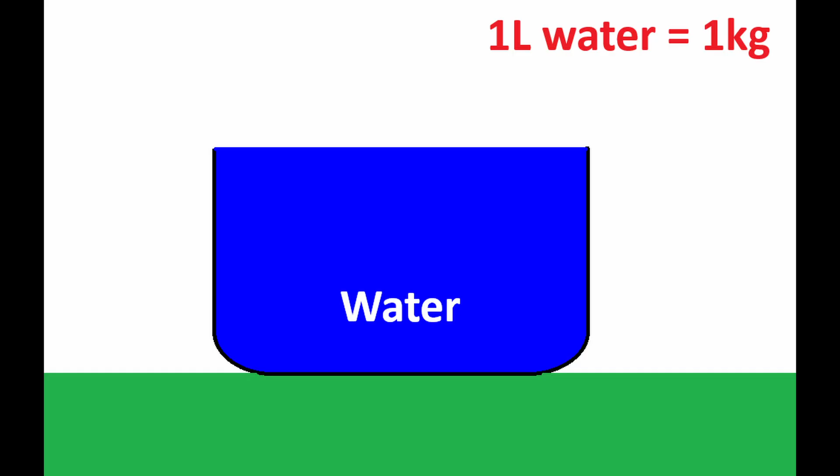For example, imagine a pool of water filled right up to the height of its container walls. Water has weight: 1 liter of water weighs 1 kilogram. If a human being dips their whole body into this pool, the presence of their body will displace some of the water in the pool, causing it to spill out. The volume of water that spills out is equal to the volume of the human body.

The weight of that water is equal to the buoyancy force on the human body within the pool. If the body weighs less than the water it displaces, it will float. The same principle applies to a balloon that displaces a volume of air.

The total force of buoyancy pushing the balloon up is equal to the weight of the displaced air. The balloon will float if there is a net positive difference between the weight of the displaced air and the weight of the balloon. The weight of the balloon here would be the materials that make the balloon, as well as the weight of its passengers and cargo.

But how can we measure the weight of a volume of air? This can be calculated if we know the air density. Using the air density, we can find the weight of air for a given volume V with the equation: the weight of air, W_air, equals the density rho times the volume V times the gravitational acceleration constant g on Earth's surface, which is 9.81 meters per second squared.

Air density is usually readily available information which you can reference for a given temperature and pressure. However, it's also possible to calculate air density using the ideal gas law with a temperature and pressure value. Let's determine the lifting capacity of a balloon of our own making.

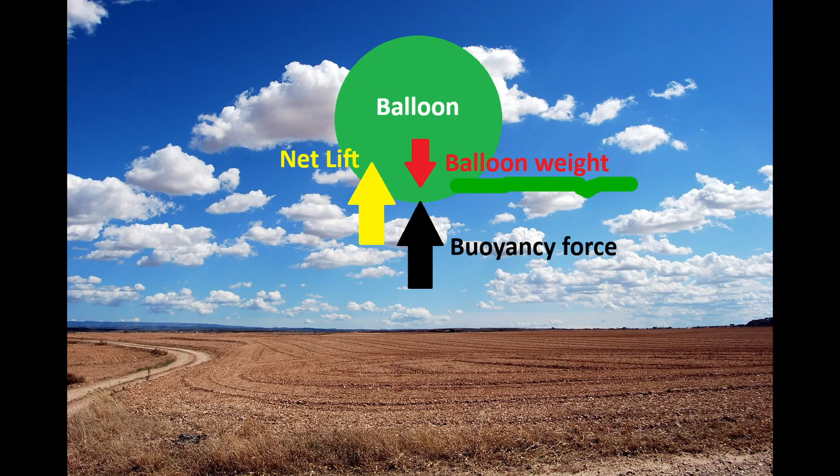The actual net lifting force that the balloon experiences is the difference between the buoyancy force and the total weight of the balloon, its contents, and its payload.

For example, let's fill the balloon with helium gas, which is lighter than air. Helium has a density 7 times lighter than air. The weight of helium for the volume of the balloon is 7 newtons, meaning it weighs about 0.7 kilograms or 1.6 pounds. Thus, if we take the mass that can support our buoyancy force being 11.3 pounds and we subtract 1.6 pounds of helium, that leaves approximately 9.7 pounds for the rest of the balloon materials and any additional payload it is expected to carry.

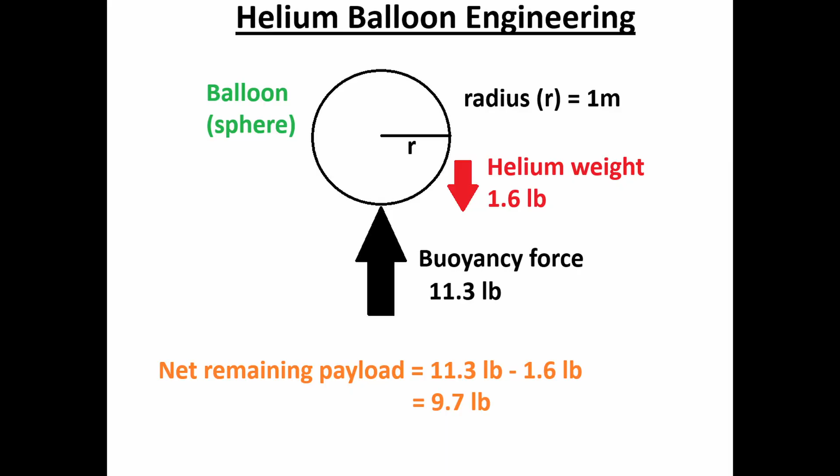Interestingly, we don't need to fill a balloon with a substance like helium to get it to float. It also floats using hot air to create a hot air balloon. When air is heated, its molecules acquire more kinetic energy, meaning they twist, vibrate, and travel at faster speeds. This also means that the molecules will naturally tend to space themselves out further, meaning that the air density decreases. This lower air density for hot air means that the displaced balloon volume will be lighter than the ambient air.

The use of buoyancy to generate lift is based on creating machines that are ultimately lighter than the air that they displace. However, modern aircraft are much heavier than air, so how is it that they are able to fly? Airplanes generate lift using wings or airfoils.

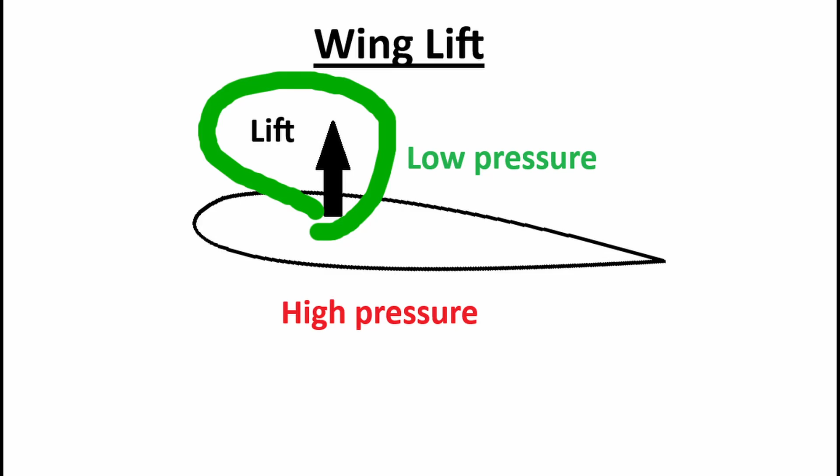Wings produce lift by generating an air pressure difference between the top and bottom sides of the wing. Lower pressure on the top of the wing versus higher pressure below produces a net force pointing upward, keeping the plane aloft. When air travels around an airfoil, the air streams are forced to move around the body since the airfoil is obstructing the path of the airstream.

The air streams diverge at the front tip of the wing, some going up and over the wing while others travel beneath the wing. In either situation, there is a conservation of mass of the airflow. There's no additional air being created or destroyed, it merely travels across the wing. The amount of air mass traveling across the wing per unit of time while the plane is in steady flight is constant.

The mass that travels over the top of the airfoil tends to bunch up while it navigates around the body. This bunching up means there is less space or area for the mass to flow through. Since the flow of mass around the wing is constant, that means the only way that the mass can continue to flow at the same rate through a smaller area is by speeding up.

This phenomenon is similar to what happens when we plug the end of a water hose with a finger. The water will all of a sudden start to shoot out of the hose at a much faster rate.

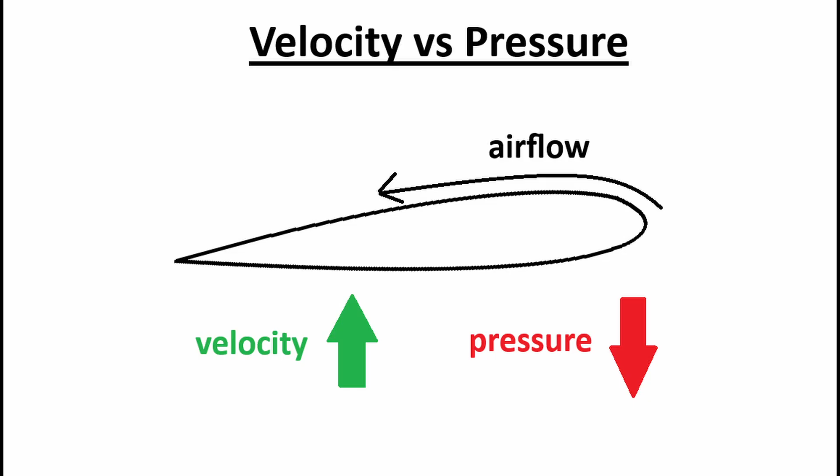There's a link between the velocity of the air mass and the pressure it experiences. This relationship is captured in a formula called Bernoulli's equation. It shows that the pressure plus 1/2 of the air density times the square of the air velocity is constant. Notice that if the velocity of the air goes up, like when the air passes over the top of the airfoil, that means the air pressure must go down to satisfy the equation.

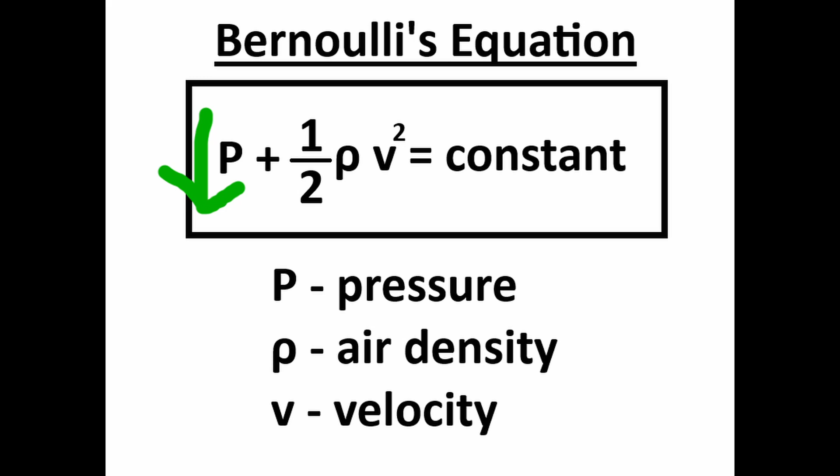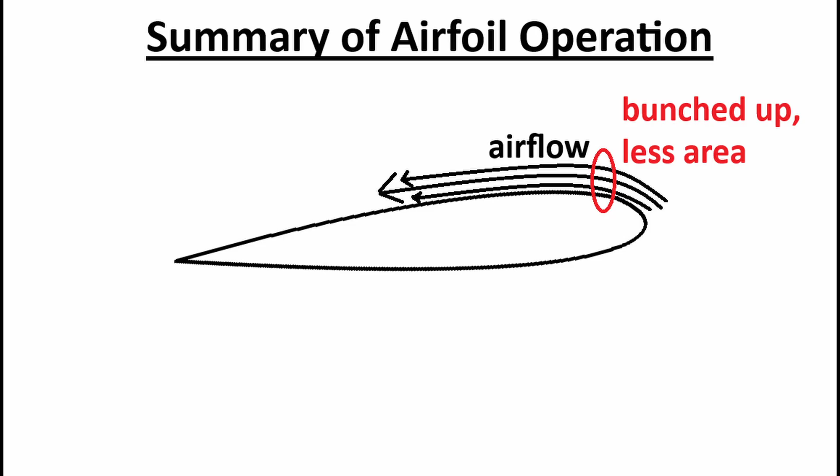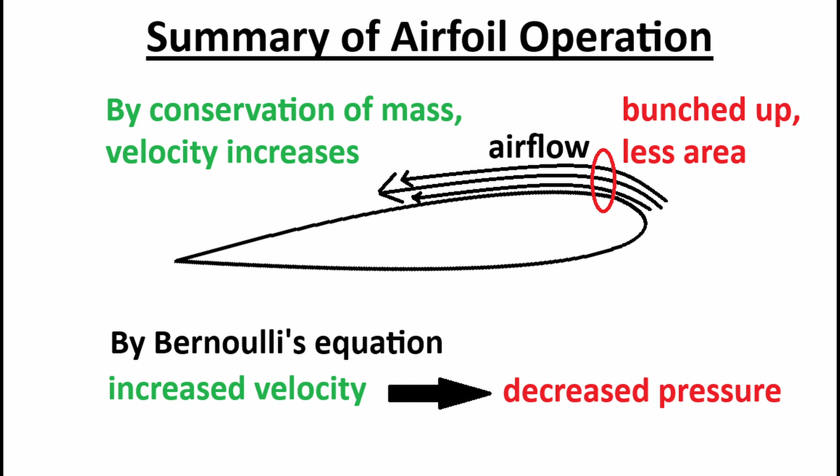So to summarize, air is forced to move around the airfoil, which is obstructing the path of the airflow. The air stream bunches up as it moves over the top of the wing, which reduces the area that the air can flow through. Due to the conservation of mass, the air is forced to speed up to maintain a constant airflow. Then, by Bernoulli's equation, we see that the increase in air velocity means that there is also a decrease in pressure. The net difference between the air pressure above the wing and the air pressure below the wing results in a lifting force.

We can conduct a simple experiment to demonstrate a mass flow over a curved surface and Bernoulli's principle. Take running tap water and a spoon. Here, the spoon acts like an airfoil and the water mimics airflow. Hold the spoon by the tip of its handle so that it's dangling below your fingers. Now gently bring the spoon into the flowing water stream.

Notice that the spoon will experience a force that attracts it towards the water flow. The spoon experiences lift within the water stream.

Additionally, notice that the air that runs over a wing takes a curved path. In order for that airflow to curve like that, there needs to be an applied force. This force comes from a higher pressure on the outside of the curved airstream toward the lower pressure on the inside of the airstream. In fact, as you move from a distance far away from the airfoil toward the surface of the airfoil, the pressure steadily decreases.

The stronger the curvature of the airflow, the lower the pressure at the airfoil's surface. The shape of the airfoil influences this airflow curvature, which also influences the produced lift. Thus, the shape of the wing can be designed to modify the lift.

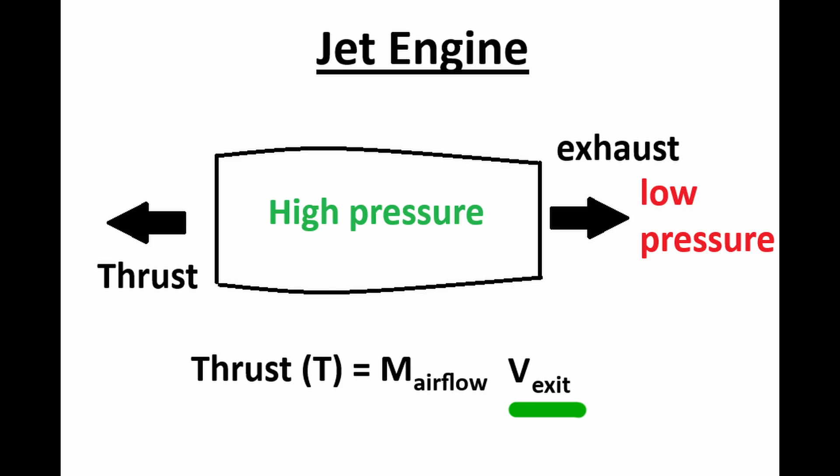A turbojet engine works by making the exit velocity extremely large. However, on its own, this is actually a very inefficient process. The exhaust of the engine produces a lot of kinetic energy that is ultimately released as wasted heat into the atmosphere. Thus, alternative designs have been created to make jet engines more efficient.

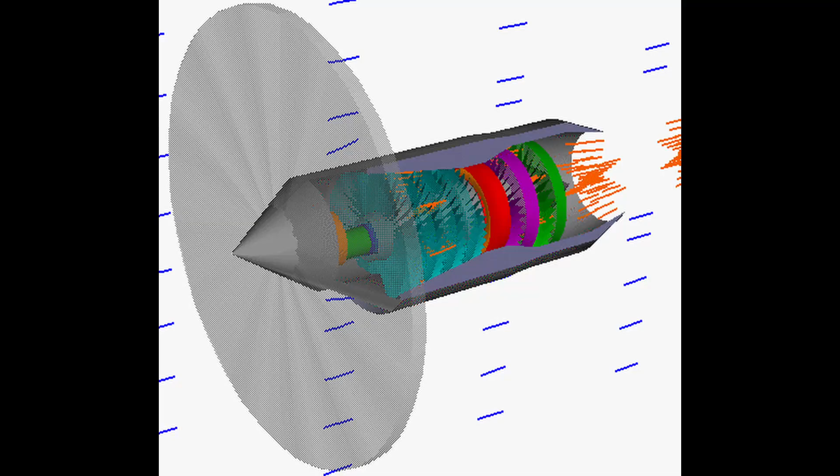A turboprop engine is a kind of hybrid engine that combines a jet with a propeller. The propeller produces most of the thrust. About 85% of the kinetic energy from the jet exhaust is extracted through a turbine to help drive the propeller. The remaining 15% of the jet exhaust directly produces thrust. This type of design is found on smaller commuter aircraft.

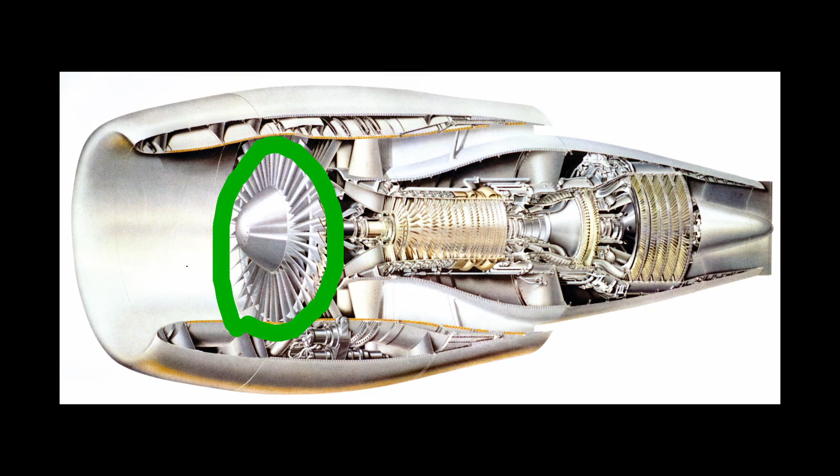A large air mass is directed around the engine core through a bypass directly out of the engine at a relatively low exit velocity. The rest of the air mass travels through the engine core. The engine core consists of compressors and a combustion chamber.

The compressed air is mixed with fuel and ignited to produce very high energies in the flow. This exhaust is routed through turbines to extract the energy to run the fan and the compressors. The remaining exhaust is then routed through the nozzle where it is accelerated to a high exit velocity.